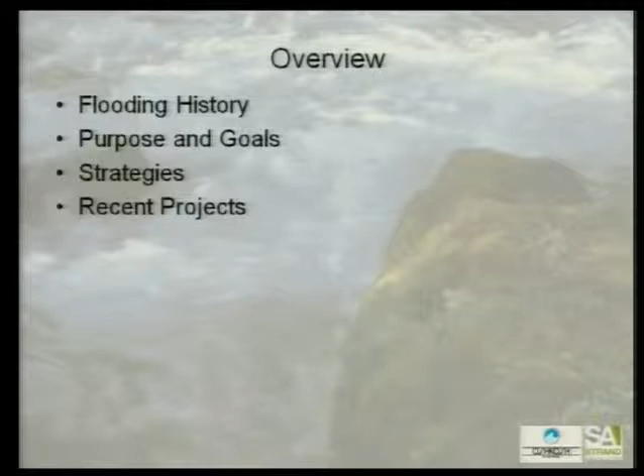All right, sounds good. Thank you very much, Emily. Some of the things we're going to be going over today, we're going to get into a little bit of the history of some of the flooding issues that we've had here in the City of Oshkosh. Talk a little bit about the purpose and goals of our stormwater management program. Get into some of the various strategies that we use for reducing the impacts of flooding and improving water quality, and then go over some recent projects over the past 5 years or so.

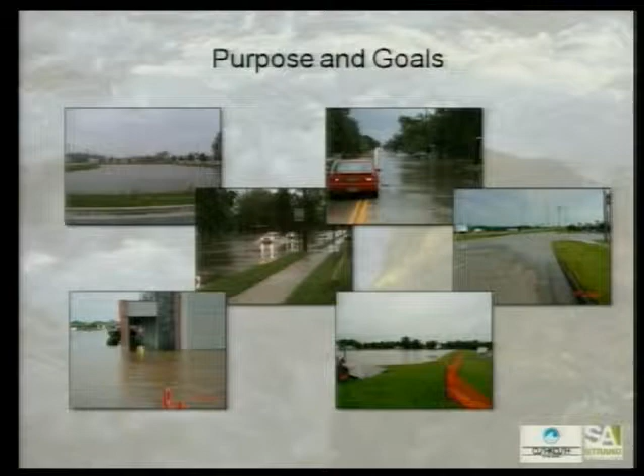Some of the purpose and goals of our stormwater program: we're always trying to reduce the health and safety impacts due to flooding, both in the street and on private property. Street flooding impacts the ability of our emergency services, police, fire, ambulance service. If the streets are flooded, they can't get to somebody who might be in dire need of emergency services. It also impacts healthcare facilities. We've got Mercy, Oakwood, Aurora, and numerous other facilities. Evergreen Manor is a senior assisted living facility over along Sawyer Creek. So there's a number of those type of facilities that have also suffered from flooding over the past several years, and then all the other impacts to residential properties and other businesses within the city.

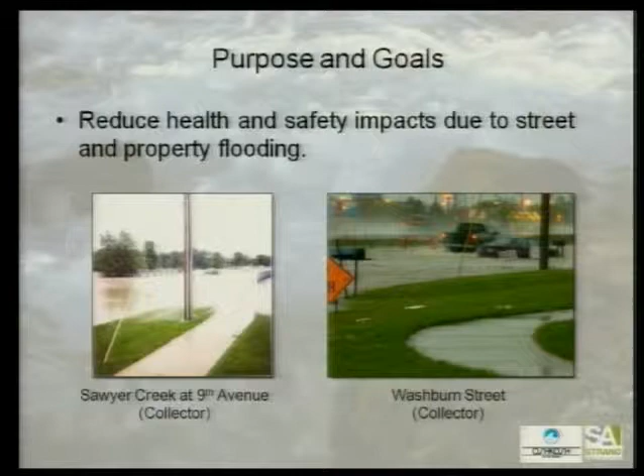Taking a look at some of the more severe areas, we've got 9th Avenue, which is classified as a collector street, not a local residential street - it sees a fair amount of traffic - and Washburn Street, just south of 9th Avenue. You can see in these images significant amounts of flooding, to the point where the streets really aren't passable. This Washburn Street location is maybe 1,000 feet from a fire station, so again fire department access is limited by these street flooding incidents.

They've had instances where they've had to deploy sandbags to try and stop the creek waters from entering their facility. Again, Westfield Street over by Evergreen Manor has had to spend a lot of time preparing for and responding to flooding during some of these major events.

It doesn't even look like a street there. No, it really doesn't. It's like a river.

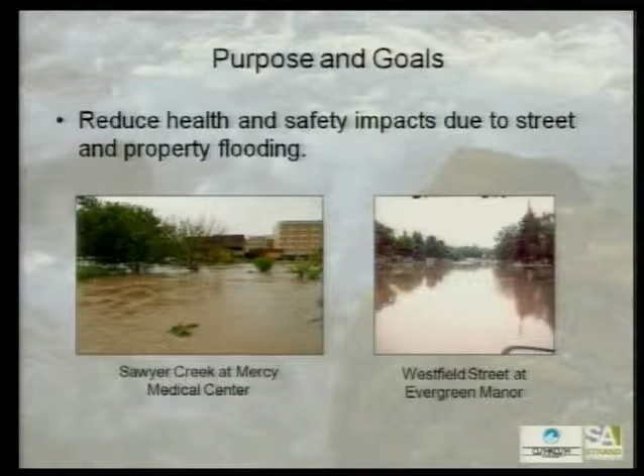During the 2008 storm event, while I was out reviewing some of our flow drainage ways around the city during and after the storm, we actually watched a couple of people park in the Mercy Oakwood parking lot, get their kayaks off the roof of their vehicle, and put in at Mercy Oakwood to kayak down Sawyer Creek. Oh my gosh. So yes, it's pretty significant.

And that volume of water is dangerous. You don't want people trying to do that because it is very dangerous. You don't want to depend on your kayak for your morning commute.

Now, you said that they have had to set up sandbags and everything to prevent the water from coming into their facilities. Have they ever had any kind of damage done?

I know Evergreen Manor has had a significant amount of flooding damage over the years. In my conversations with Ken Arneson from Evergreen Manor, they have had millions of dollars of damages over the past 15, 20 years due to flooding.

Mercy Oakwood, I believe, has had some damage as well. But like I said, they have sandbags, and they have at times requested assistance from the city crews to help them deal with some of the issues. But yes, to my knowledge, they have also had damage in their facility due to that flooding.

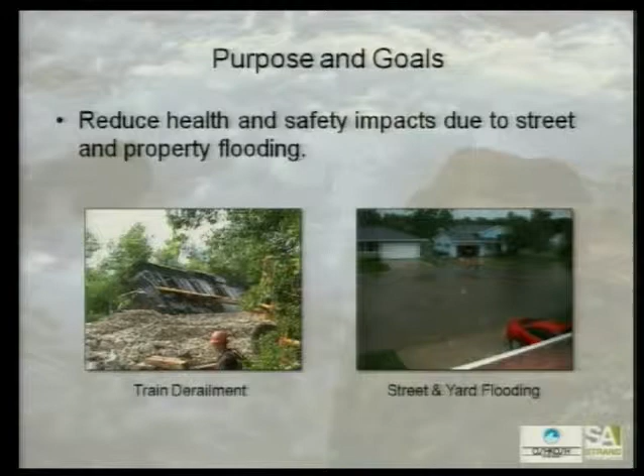Again, into some more of our purpose and goals: in addition to trying to reduce the amount of street flooding and property damage, we're also trying to reduce the amount of clear water that gets into our sanitary sewer system.

There's been a lot of talk about I&I, inflow and infiltration into the sanitary sewer system. That sanitary system is designed only to handle sanitary waste - flushing your toilet, taking a shower, running your washing machine. Those are not high flow generation activities, so that sanitary sewer is only sized to handle that flow.

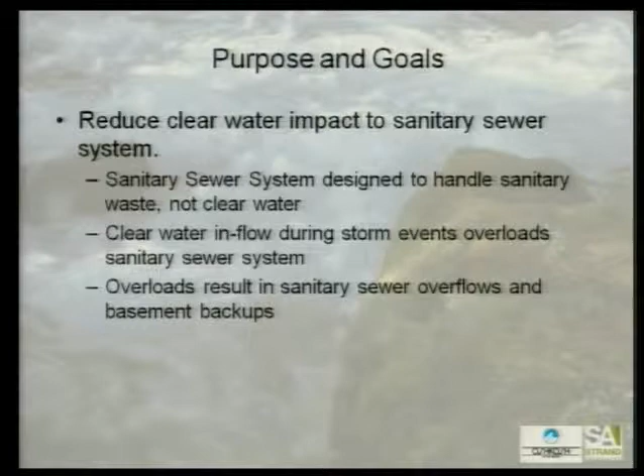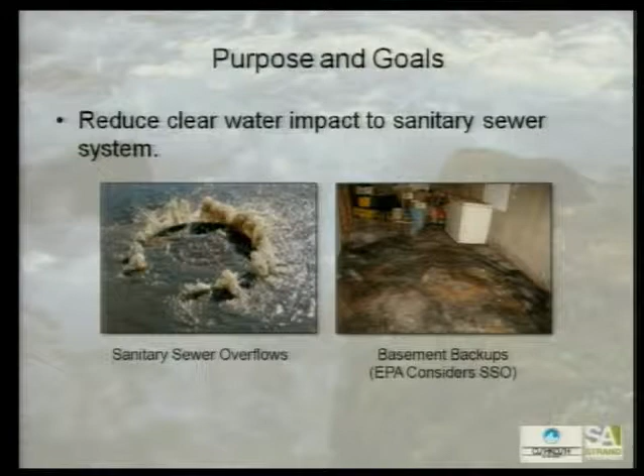And on the other side, you've got a basement backup where clear water overloaded the system, and clear water and sanitary waste all backed up into a basement and caused damage as well. So it's a different system, but in these heavy rain events there's such an ability for the two to interact that the stormwater system - we're really trying to do our best to get that water off the street to reduce the impacts on the sanitary system.

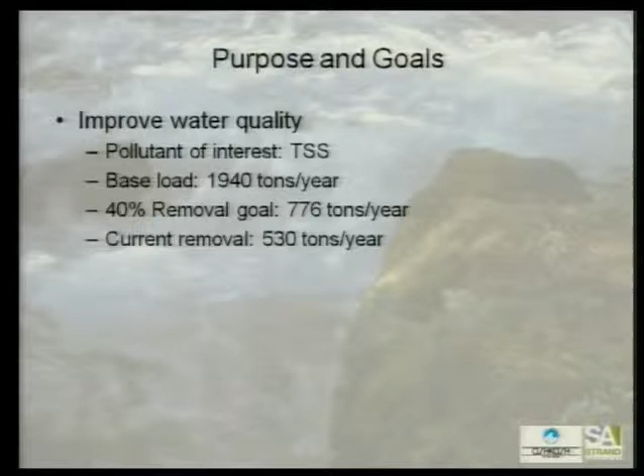Another one of our goals that we briefly talked about is improving water quality. The Department of Natural Resources looks at total suspended solids, or TSS, as the pollutant of interest. In general, all the other pollutants, the heavy metals, the phosphorus that runs off with your lawns, tends to cling to the sediment particles. So the suspended solids is the pollutant that the DNR has chosen to try to model.

As we continue on, there's regulations in place now for phosphorus as well. Looking at the base load from the city of Oshkosh, we generate just under 2,000 tons of sediment a year in our stormwater system. To meet our 40% removal goal, which was put in place by the state, there have been some changes, but that's still the goal we're looking at. We need to remove just under 800 tons per year.

Right now, with all the practices we've got in place, the detention basins we've built, the street sweeping, which picks up all that sediment off the gutter of the street, some of our streets that are still rural sections where there's a ditch, and practices like the biofilters we installed out here in the City Hall parking lot, those are all a number of practices that serve to remove those pollutants. So it's kind of a proactive thing—you're trying to get rid of the pollutants before they have a chance to get into the stormwater.

As soon as the stormwater hits the surface and starts to flow across it, it's picking them up. So street sweeping is a proactive approach, trying to get those pollutants off the surface before the water picks them up. Once it's in the stormwater, detention basins and biofilters are trying to filter those pollutants out of the runoff. Yes, got it.

Right now, our practices are removing about 530 tons per year. So we've still got about 120 tons in our planned projects, and about another 120 to go to meet our goal.

One thing to keep in mind, Lake Butte des Morts, the Fox River, and Lake Winnebago are considered impaired water bodies by the Environmental Protection Agency. As such, the EPA has mandated the DNR to do an analysis called a total maximum daily load. What that does is say this water body is capable of assimilating this amount of sediment without causing it to not meet its recreational purposes. So the Fox River, for example, is used for boating and fishing, so there's a certain amount of sediment the river can assimilate and still be clean enough for those recreational purposes.

So with the total maximum daily load, or TMDL as it's often referred to, it says this water body can only take this amount. Then the analysis says, just throwing a round number out, it can take 200 tons per year. But City of Oshkosh, you're putting in 2,000. Well, you've got to reduce that. So that's what that analysis does.

We know they've started the analysis on the Upper Fox. We expect early in 2015 we should be seeing some preliminary load allocations to tell us where we're going to be getting to. And by late 2015, early 2016, we'll be given a requirement that we have to start working towards.

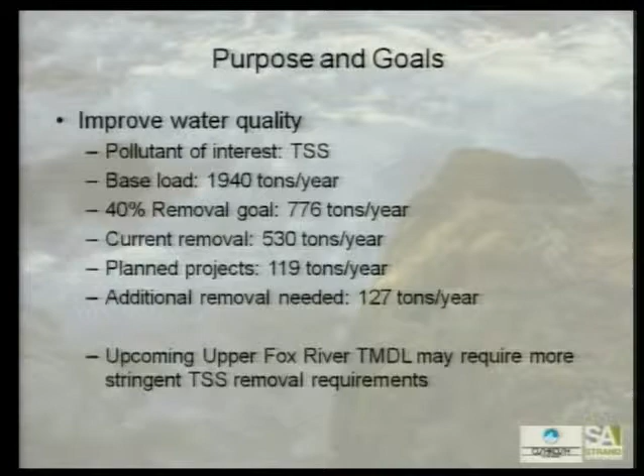So that 120 tons you see up there for planned projects, 50 of that is right in that Armory project. Excellent. So yeah, we're always looking for ways when we're doing a project to also improve water quality, because it's less expensive to do both at the same time than to do one and then come back and try to retrofit the other later. Definitely. Great.

A little bit more about our purpose and goals. You will hear us as design engineers refer to a 10-year design storm. Really, that is a storm that has a 10% chance of happening in any given year. You could roll the dice and get 5 ten-year storms in a row. So what we're trying to do is keep that runoff completely off the street and in the storm sewer system.

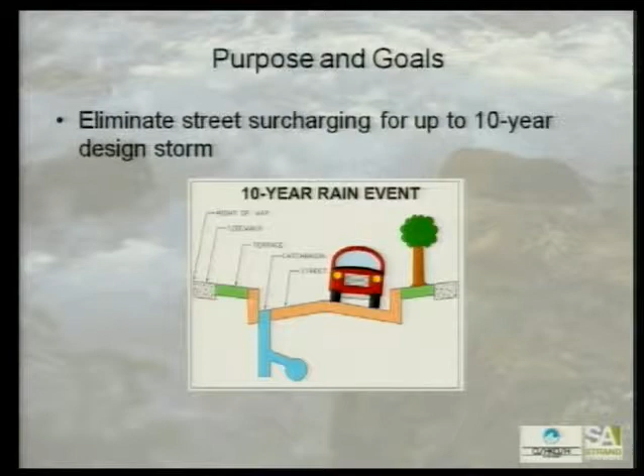Getting into what we refer to as a 25-year design storm, which has a 4% probability of happening in any given year, we're trying to keep the center of that road dry. So the gutter and parking lanes, there's going to be water standing there, but we're trying to keep that center clear so emergency vehicles can get in and out. So somebody gets off work and it's been raining all day, they can still get to their house, but there's going to be some water standing in the street—still drivable.

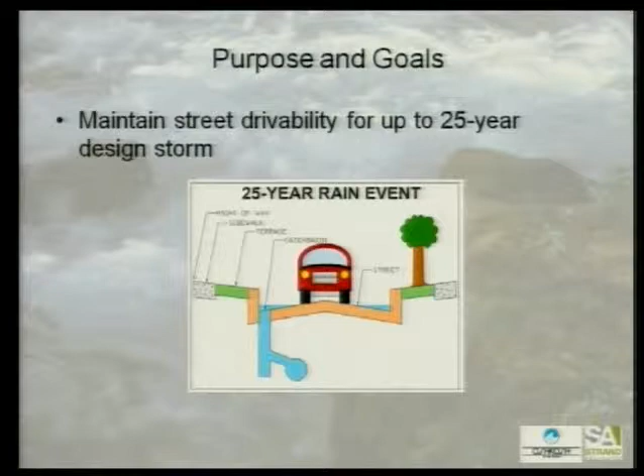And then that 100-year design storm, or that 1% chance, we're just trying to contain that in the right of way and keep it from getting out and impacting other properties.

One question I had when we were briefing was, what exactly do you consider the right of way—starting at the sidewalk, which end of the sidewalk, or at the terrace? Generally speaking, in the City of Oshkosh, the right of way is from the back of sidewalk, or your house side of the sidewalk, all the way to the back of sidewalk or the house side of the sidewalk on the other side of the street. So the sidewalk is completely contained within the street right of way, pretty much up until your property line.

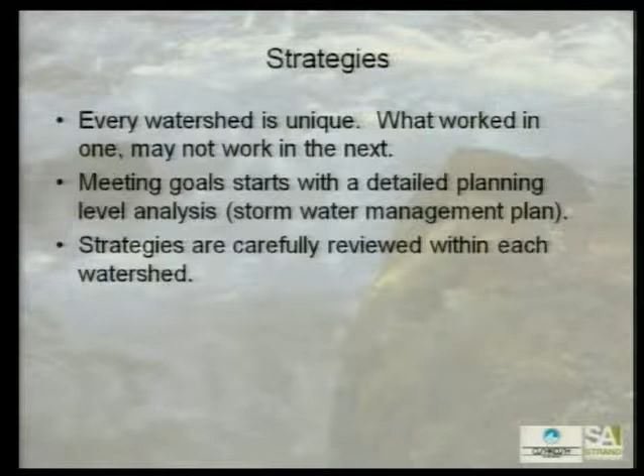Some of the various strategies we go through—every watershed is unique, and what works in one might not work in another. Really, meeting our goals starts with a detailed planning level analysis, or what we refer to as a stormwater management plan. Then as we're going through the plan preparation, the strategies are reviewed for each watershed as we're going.

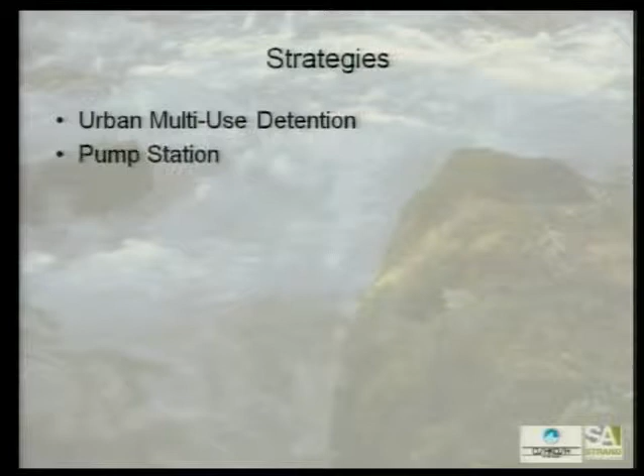We look at kind of an urban multi-use dry detention basin, which corresponds to the Tipler detention basin we're going to talk about. We've also got a large pump station.

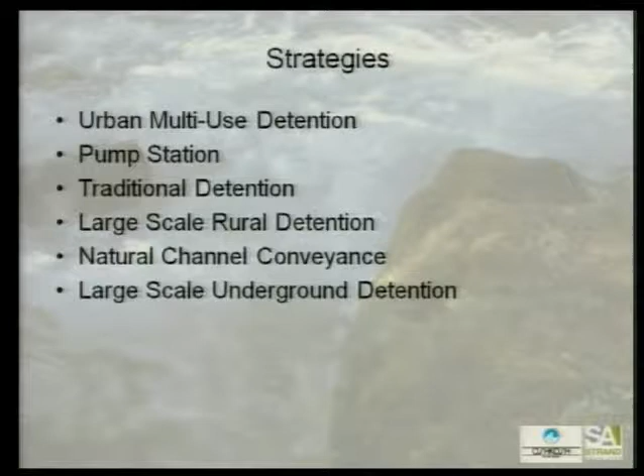Here in the City of Oshkosh, our strategy is really to avoid pump stations if at all possible, because when do you need the pump station to work? During a storm event. When is the most likely chance the power is going to go out and the pump station's not going to work? During a storm event. So one of our fundamental beliefs is gravity always works, so we try to convey the stormwater with gravity when at all possible. As an absolute last resort, we'll go to mechanical or pumping, because that's the time it's going to go out, and that's when we need it the most.

And the other options look a lot nicer than the pump station as well. Yeah, it's very expensive—that's the Melvin Avenue pump station. We'll talk about it a little more, but it was a very expensive project. It was the only option for that watershed though.

Traditional detention basins, something like the West Haven Clubhouse area basin—large scale projects like the James Road project, that site sits on 55 acres of land, a very large project. Some channel conveyance upgrades, the Sawyer Creek dredging project is a prime example of that. And the large-scale underground detention—anybody who came to City Hall in 2013 was well aware of what went on there. Anybody who visited our website too—I want to extend a thank you to you and your staff for all the time and effort that went into being able for us to live broadcast that project out on the internet. That was huge.

And then, storm sewer conveyance—anytime we're doing a project, we're trying to put in larger conveyance just to get that water off the street.

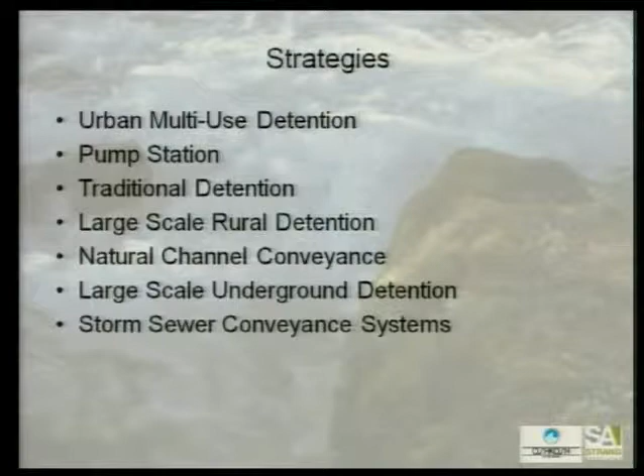Getting into some of our recent projects, I'll turn this first one over to Matthew, who was the design engineer for the Tipler Dry Detention Basin.

The Tipler Dry Detention Basin is literally right behind Tipler Middle School. In such a developed urban area, large open pieces of property are hard to come by. Schools are great places to look, but we don't want to take away their recreational fields, their soccer or athletic fields.

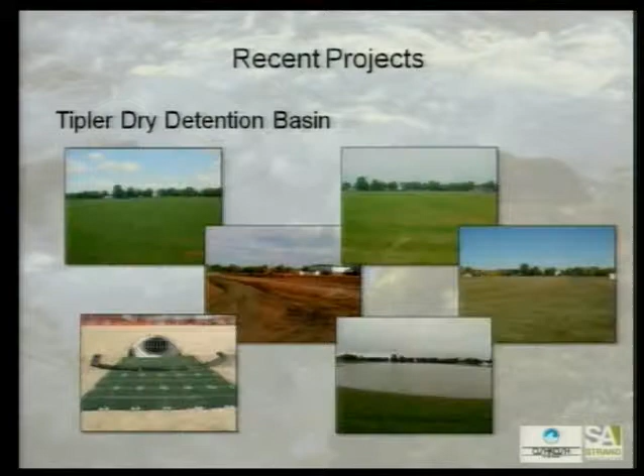Working through the school, this became our multi-use detention basin. We were able to depress the area behind the school to temporarily contain the stormwater, and we put in an underground drain tile system to get that athletic field back into use more quickly.

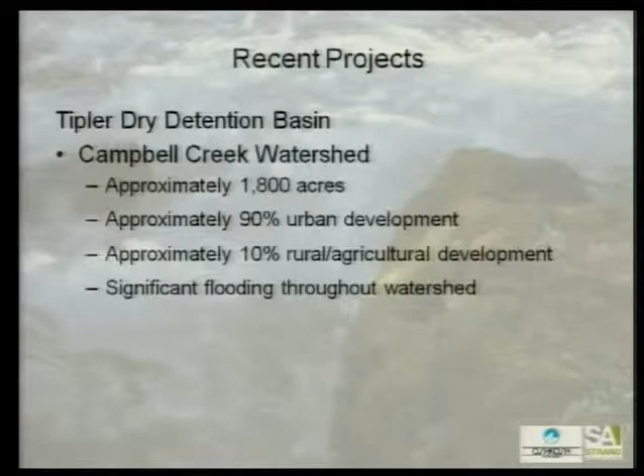It probably was wet for 48 hours, not usable for about a week. That's the difference between a traditional detention basin and a dry one: the dry basin is still level land, gets flooded for a couple days, but eventually dries right back out to a field.

When we're utilizing school property for such a thing, we really want it to get back to that school use as quickly as we can. This was an area experiencing significant flooding—the property had flooded before, not to the same extent, and it really helped a lot of people in that urbanized area.

That athletic field routinely flooded during major events. With this project it's usable in maybe a week, whereas it was a month in some prior events before they could get back out and use it.

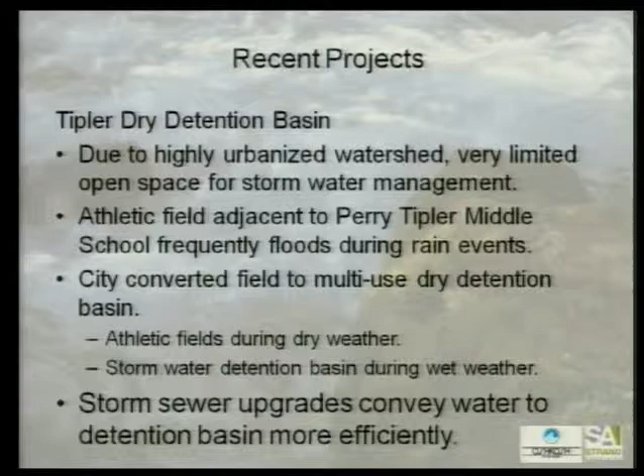We also had to do some conveyance upgrades—the storm sewer pipes upstream of the basin had to be improved so we could get the water there more quickly. Conveyance is simply where we pick up the stormwater in an inlet, it gets into the pipe, and then gets conveyed or redirected somewhere, in this case discharged into the detention basin. Those upstream conveyance systems were as important as our ability to detain the water in the basin.

The approximate construction cost was about $600,000. We benefited significantly from the Highway 41 work going on at the time. Typically the excavation would have been far more expensive, but that dirt was needed on the 41 project, so contractors were willing to come in and dig it out at a very reduced rate.

The DOT was paying contractors to find dirt, primarily for constructing the Butte des Morts Causeway—a lot of dirt went into that construction. So contractors were bidding our projects at a quarter of the excavation costs we'd normally see, because they were getting paid by the DOT on that side and by us as well. We saw significant cost savings on projects that took place at that time—everybody kind of wins.

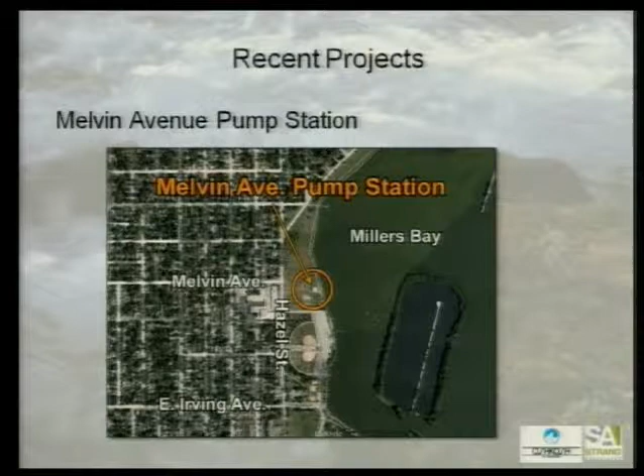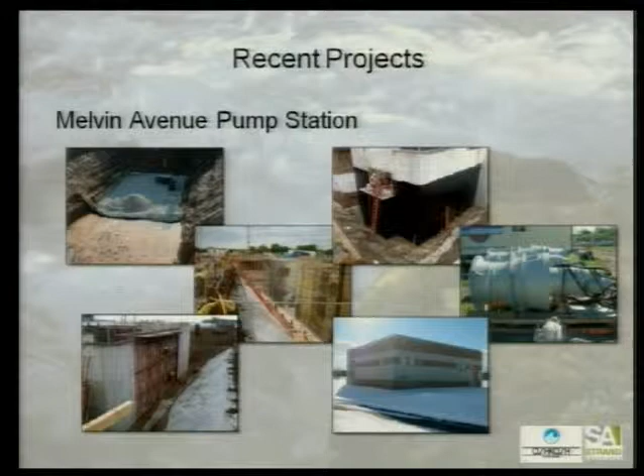Moving on to the Melvin Avenue Pump Station project. Here you can see the pump station is located just off the east end of Melvin Avenue in Menominee Park, for those that play softball, just north of the Reetz Diamonds. So it's a very visible location, but very important and functional. Some of the images here show during and after construction, giving you a scale of the work taking place.

The Melvin Avenue watershed itself is only about 105 acres, so not a very large watershed, but it is completely developed in urban development. There's no open space. So in order to do a traditional detention basin, which was one of the alternatives we analyzed, would have meant purchasing and demolishing several homes to construct the detention basin.

So in this case, we did look a lot harder at some of the other alternatives. There was significant flooding in the watershed, and the low point, right at the intersection of Melvin and Evans, the street elevation is only about 6 inches above the Army Corps regulation for the lake level for Winnebago for boating season. So any amount of water in that intersection would flood because it just couldn't get off the street, since it was impacted by the lake level so much.

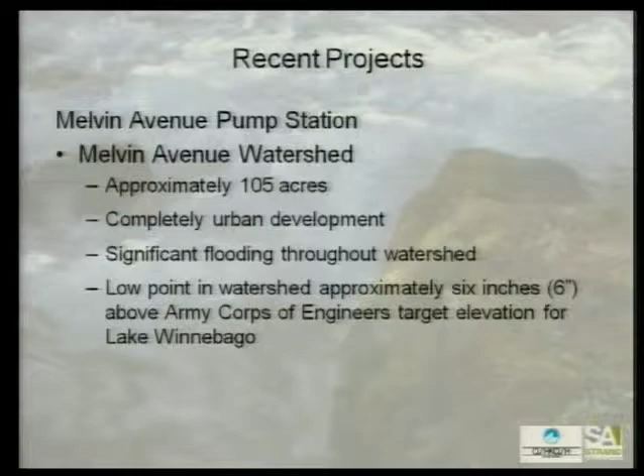Some of the people that had lived there for a long time, as we were meeting with them, would joke that the neighborhood kids go fish in the street inlet because there's fish in it, because there's that much water impacted from the lake. Or you see ducks swimming in the puddles.

As I mentioned, we did look at a lot of alternatives for this project: traditional detention basins, strictly doing storm sewer upgrades, or the pump station. Really the best alternative for us was that large pump station with some very significant storm sewer upgrades.

There is a 4-foot high by 8-foot wide box culvert storm sewer underneath Melvin Avenue that conveys the water to that pump station. That pump station has a design capacity of 180 cubic feet per second, approximately 81,000 gallons per minute. Another way to think about it is that design capacity is the same as the wastewater treatment plant's design capacity for the entire city of Oshkosh. So for only a 100-acre watershed, this is a very significant structure.

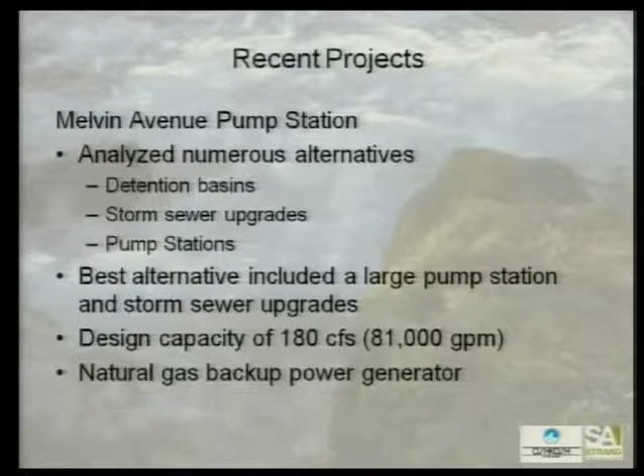As we talked about, gravity always works. We're trying to avoid this. The way we mitigate that potential is we have a natural gas backup power generator installed at that facility. Should the power go out, the backup generator will automatically kick in. The controls in the station sense when the power went out and will automatically fire that generator up so the station's immediately back online.

That does alleviate the worry that if the power would go out, which it often does during a large storm event, you wouldn't have to worry about that breaking down. How long has this pump station been in use for? The pump station was completed in the fall of 2010. So about 3.5 years now. And it's been working great since you've installed it?

Yeah, it really has. The staff at the wastewater treatment plant are also the staff that maintain all the sanitary pump stations, so they have working knowledge of this type of equipment, and they're the same staff that monitor this pump station at Melvin Avenue. The station also communicates via radio back to the wastewater treatment plant, which is manned 24/7, 365. If something happens at the pump station, the staff know about it immediately and can dispatch service staff to go analyze the problem and get the station back operational. So yes, it is always monitored in that regard.

Our staff also go out and run that generator once a month just to make sure it's going to work when we need it. Have you needed to use it yet? To my knowledge, we have not had an outage during a storm event that's impacted that station. But, like I said, you don't want to find out when the power goes out that your backup generator doesn't work.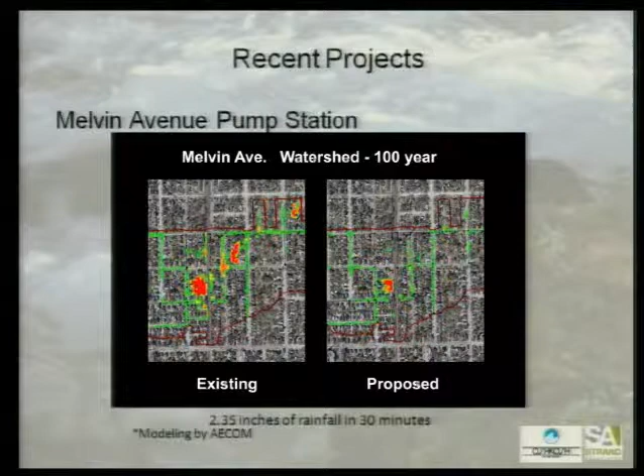These videos are generated from our modeling software. As we work through these analyses, we go back and look at an actual storm event, like the June 2008 storm, and run those existing conditions in the model, then check whether that reasonably reflects the amount of flooding we saw in this watershed. That's our quality control, our quality check on the model.

Sometimes it requires going back into the model to find things that needed to be set up a little differently. But generally we're seeing modeling results that very closely mimic those actual storm events. That's something we do with all of our analyses. It provides great confidence in the design or the solution.

When we go to the public with a solution that costs literally millions of dollars, and we can show them this is what it is without it, this is what it is with it, it is very powerful. Especially if after it's constructed and there is a storm event, they truly see those same results. It's almost prophetic, you see it, and when it happens, it's exactly as you said it would be.

Now, this pump station hasn't been around too long. Has there been a 10 or 25-year storm since we installed it? I would say the storm event from 2012, around May 10th, 11th, 12th, that was somewhere around a 25-year storm, a little bit more than that.

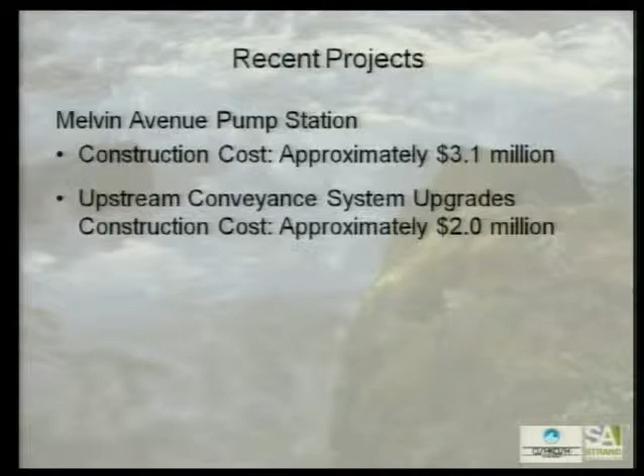So in this 100-acre watershed, we've put in excess of $5 million worth of construction projects to really deal with the challenges of this watershed. It's amazing the amount of progress that's been made. I've only been in Oshkosh for about a year now, and just hearing from the city manager and other city employees how bad it's been a decade ago, and the progress we've made, it's just amazing.

After all the construction, it's all worth it. But we've got a long ways to go, it's an ongoing effort. One analogy I use a lot is, it took us 150 to 200 years to get to the point where we were at. We're not going to fix that in 5, 10, or even 25 years. But as long as we continue to make significant steps forward each year, everybody's going to see the end results. Right now we're seeing specific areas really saying, wow, this has worked great for me. But then a guy 10 blocks over where we haven't done anything yet says, come on, I'm still underwater here, why is my basement flooded? Yeah, there's a lot of that yet. It's like I said, we can't fix it all in 5, 10, or even 20 years. It's going to take time.

Moving on, another project we've mentioned a little bit throughout the presentation is the Westhaven Clubhouse Area Detention Basin. This is located immediately south of the Westhaven Golf Course Clubhouse. You see Westhaven Circle just to the west of the project.

Throughout several storm events, leading all the way into the 2008 storm, there was significant flooding in this area. The residents inside Westhaven Circle had basements full of clear water. It wasn't a sanitary sewer backup. There was just that much water on the street and in their yards that it overtopped their basement windows and ran into their basements. So it's a lot of flooding.

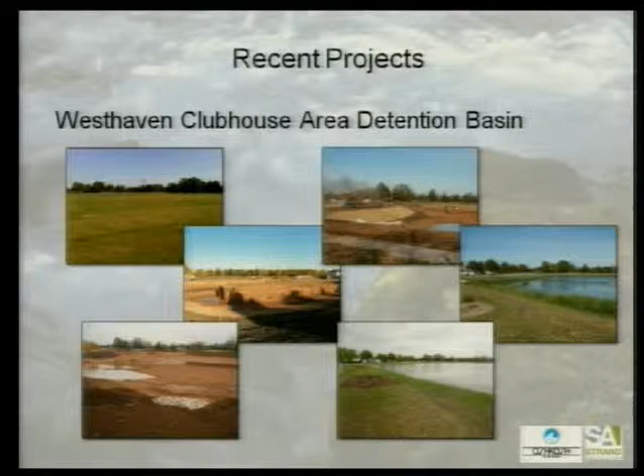Yes, very significant. And this is a traditional wet detention basin, if you will, so there's always a permanent pool of water. During small storm events, the ones that really pick up a lot of sediment off the street, by sitting in this permanent pool of water, it allows those sediments to settle out. Eventually we'll have to go in and dredge that, but it's removing those sediments and cleaning up the runoff, and then handling the larger volumes for the large storm events. So for a lot of people just driving past, they could think it's just a pond. Yeah, there's always water in it, yes.

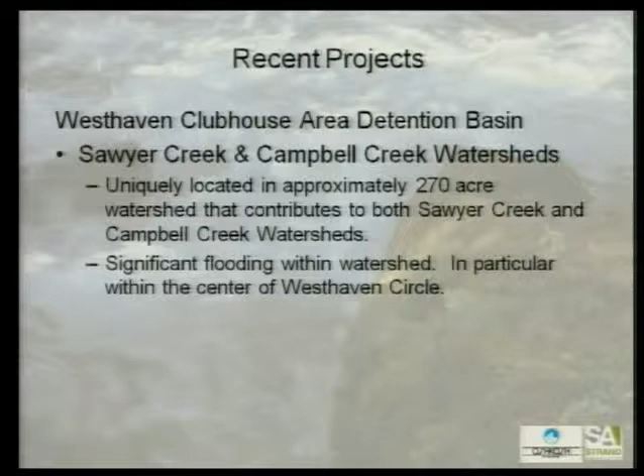The Westhaven Clubhouse area basin is uniquely located where Sawyer Creek and Campbell Creek overlap in their watersheds. It's about a 270-acre watershed that, depending on the storm sewer capacity along Highway 41, the runoff will either cross Highway 41 into Campbell Creek, or continue north into Sawyer Creek. So it can really go either way depending on which system has more capacity. And as we mentioned, there was a lot of flooding in this particular area.

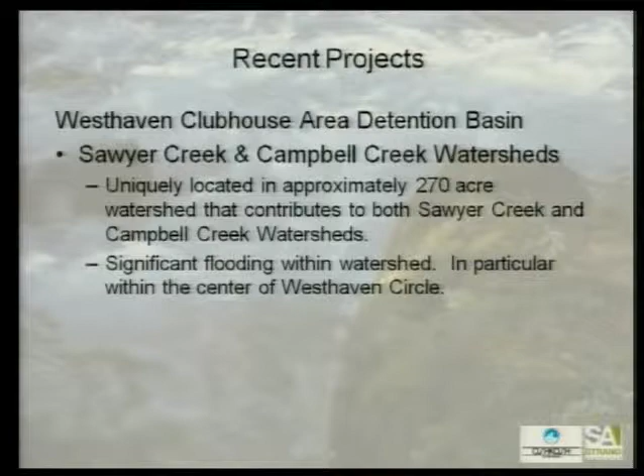So, we obtained the rainfall data from Wittman Regional Airport and entered the actual rainfall data into the computer model. This June 2008 storm was preceded, in the 4 or 5 days prior, by several inches of rain, so the ground was already saturated and couldn't absorb any more water. So everything ran off. The model calibration takes all of those things into account and visualizes it for you.

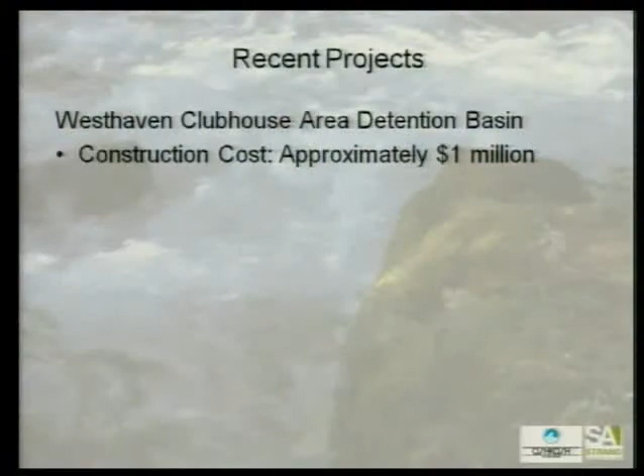With that, I'll turn it back over to Matt for the James Road project. Great, the James Road Detention Basin is the large-scale rural detention basin project.

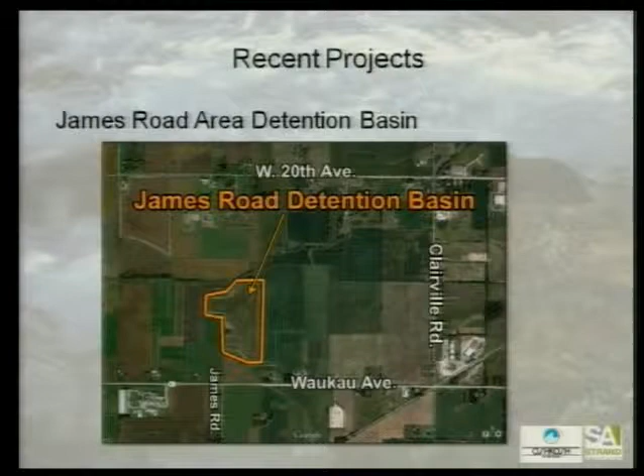It's difficult to grasp how big this detention basin is. James mentioned it's on a 55-acre site, and it's really at the doorstep of the city. I'd consider the city beginning at the intersection of Clairville and 20th, and we're just upstream of that in Sawyer Creek. So we're able to catch about 2,500 acres, not a 100-acre watershed like Melvin, but 2,500 acres of rural area into this basin, slowing down that storm surge before it gets into the city. That's the positive of having this wide open space to do that.

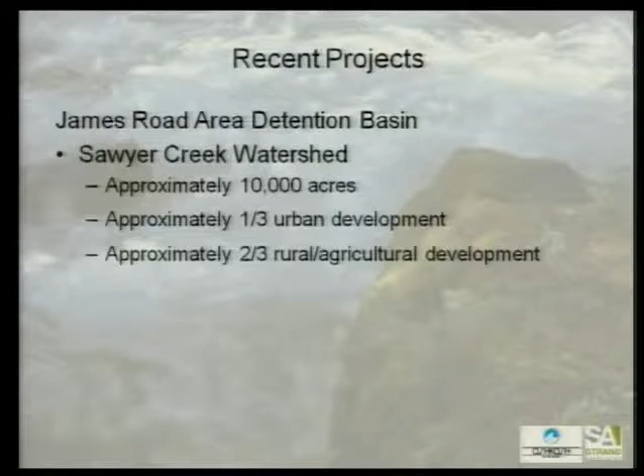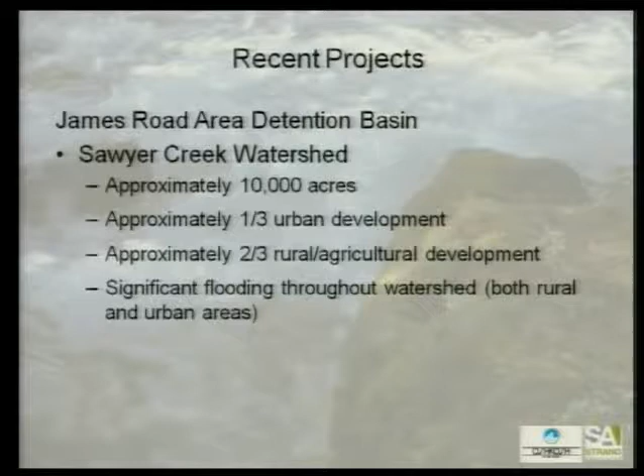The storage capacity is 250 acre feet, and an acre foot is literally that: 1 acre of land, 1 foot deep of water. An acre of land I usually equate to about a football field including the end zones. So it'd be 250 football fields, 1 foot deep of water. We did this all in about a 40-acre footprint of the basin, so the average depth of the water when it's full is about 6 feet.

The total construction cost was about $2.6 million. Including the land acquisition, it was 3.6. And we were fortunate to receive a community development block grant for this emergency action program of about $1 million, which offset our cost.

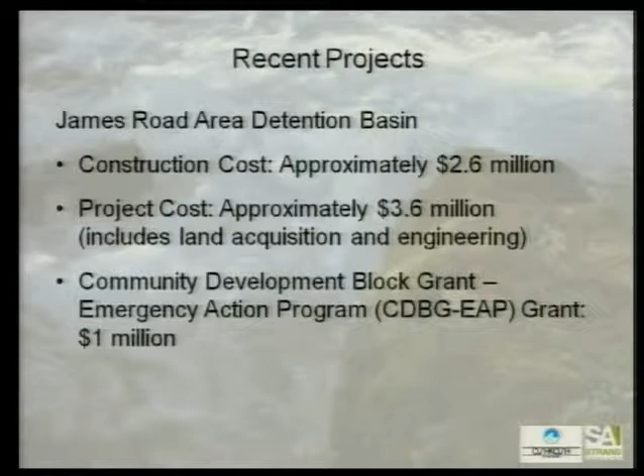We moved, in order to do this, 400,000 yards of dirt. This was really just a major earthwork project with a control structure to slowly release the water after we captured it. In this case, no, DOT wasn't available to take that dirt. We took it and moved it to another city-owned parcel for future industrial park expansion, for grading of that site, making it more developable or user-friendly to an industry that might want to come in and use it in the future.

So really it was not only filling the parcel but also leveling it. The existing land slopes were fairly steep, so if somebody was going to come in and try to develop it, it would be a challenge, and they would have to find a lot of material to do that. With this project, we were able to set up an off-road haul route.

So the contractor did not need to use licensed trucks. They could use off-road trucks, which haul a lot more material because they're not subject to the weight restrictions of our road system. They were able to move it about 1/2 to 3/4 of a mile off-road, then place it at this other location and compact it so we don't see a lot of settlement, and let Mother Nature finish the compaction for us over the next several years.

We were fortunate that the two sites were contiguous so they didn't have to go out on the road to get to the other one, and that was a tremendous cost savings. I'd say our dirt moving activity cost per yard went from $8 to $10 a yard down to $2 a yard. And when you're moving 400,000 yards, that adds up to a dramatic cost savings.

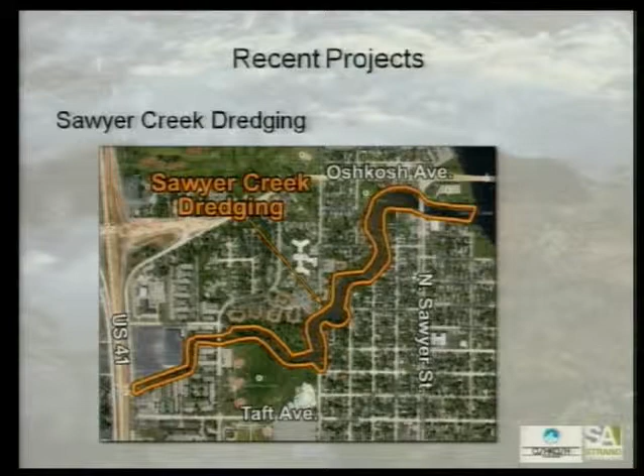The Sawyer Creek dredging project, or channel improvement project, extended from Keller Street, or Route 41, to the Fox River, about 7,000 feet, or just over a mile. Through numerous public involvement and informational meetings that the city had, there was an interest to see what effect dredging or improving some of the already natural conveyance systems might do to help relieve the flooding. Maybe you want to describe a little bit what exactly dredging is for someone.

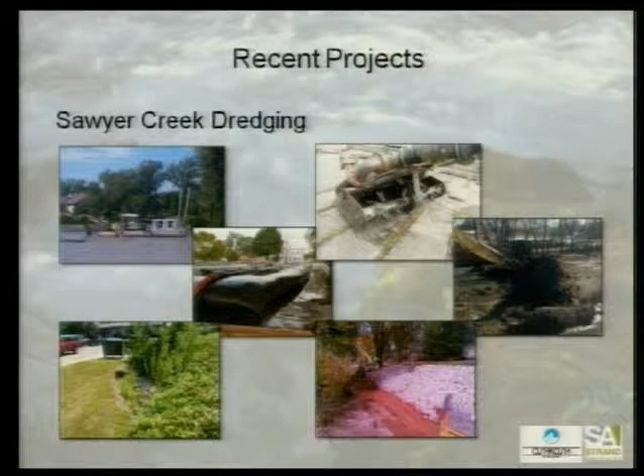I had no idea what dredging was when I first heard about it. Over time, sediment falls out of the water and accumulates on the bottom of the channel. It's the muck—when anybody steps into the lake or river and feels that squishy muck on their feet, that's what we dredged out. Once you get down deep enough onto the hard, natural bottom of the channel, that's no longer sediment.

So we didn't dredge much of that hard bottom, but really it was the soft sediment that we removed. And again, with this 10,000 acre watershed coming into Sawyer Creek, there's a lot of sediment. In fact, we removed about 40,000 cubic yards of sediment out of the channel.

That's amazing. It was actually roughly equal to the excavation for the West Haven area detention basin. When we constructed that basin, we removed about 40,000 yards of dirt. It's hard to visualize what 40,000 yards is, but for those people in and around the West Haven detention basin when it was being built, all the dirt we dug out of Sawyer Creek could have filled that hole back up.

Oh my gosh, and that was all sediment? All sediment. Yeah, and there were actually three very unique sections to the channel that you can see here.

The upper reach was very ditch-like—in fact it was a ditch. It was man-made, artificially dug years ago to realign the creek and allow development, the former Kmart site, or Sears for those who haven't been around the city too long.

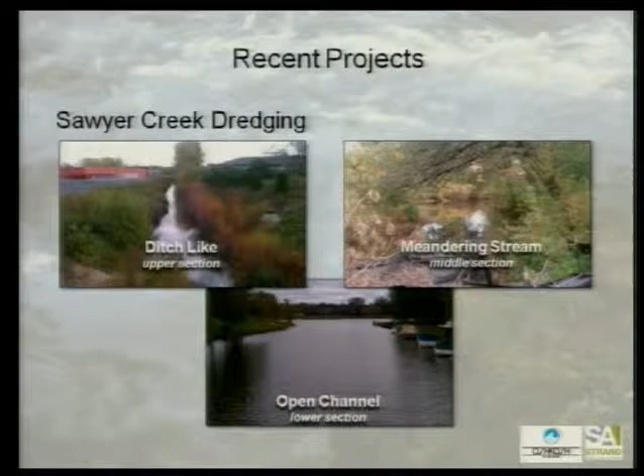Some of the dredging was done in the dry—we cofferdammed off and dewatered the channel, then took excavation equipment in and dug it out with traditional mechanical excavation, a backhoe and a dump truck. In areas where it was wet dredging, we used a hydraulic dredge, a unique, sophisticated piece of equipment.

That hydraulic dredge probably did the majority of the work, to tell you the truth—I'd say 25,000 yards were hydraulically dredged and 15,000 were mechanically dredged. You can't empty out the whole thing and do it dry. But in that upstream section where it was narrow, we were able to dam it off and get the water out much easier than in the lake-type section down below.

I think we've got some graphics coming up too, Emily, that will describe it a little bit better. There were a couple things we did to get our permit, and that was to mitigate the impacts to this natural resource.

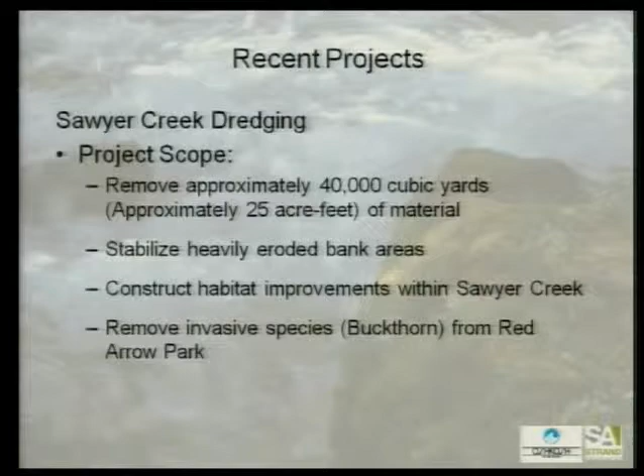Waters of the state, they're for everyone. When we came in to dredge, the DNR looked at that as an impact to the natural resource, so they wanted us to mitigate that—what could we give back for being able to go in?

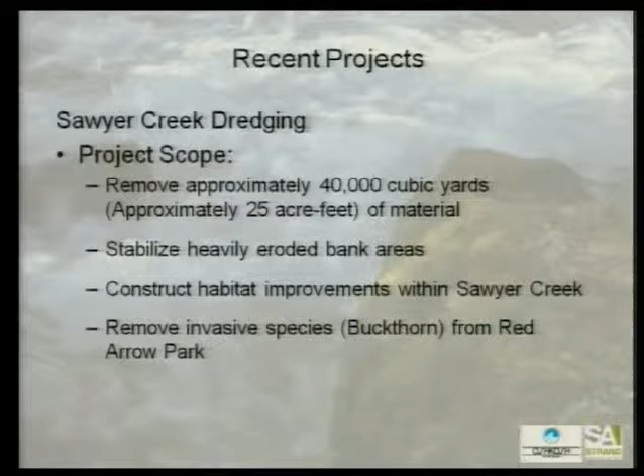So we stabilized some heavily eroded banks, constructed fish habitat in two separate locations along the creek, and removed an amazing amount of invasive species, or buckthorn, within Red Arrow Park. That dramatically changed that park—anybody out there will know what we're referring to when you see it.

I think we also have some more pictures coming up a little later to show a before and after of that. We got a lot of comments from people about the dramatic change they saw immediately with the park.

It's so interesting because it's not only a stormwater project at that point, it's so much more than that with all those extra benefits. Yeah, there are some ancillary benefits to it for sure. So this is our proposed channel section.

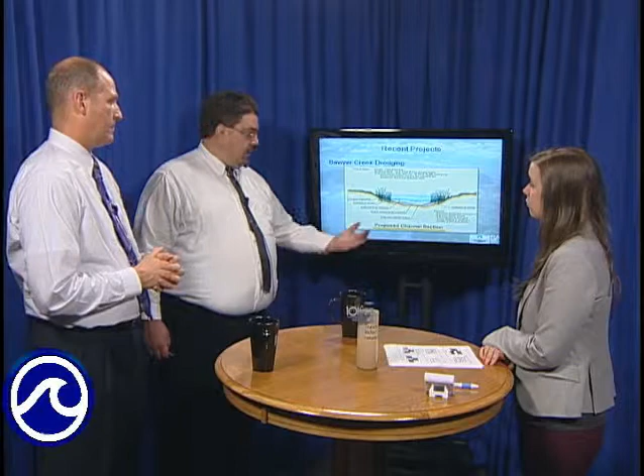One important thing to point out while looking at this image, near the banks our dredging area stops short of the bank. You can see that the area right near the banks, we did not remove the sediment from. That was one of the negotiated items with the Department of Natural Resources, because by leaving this sediment in the very near bank area, you're able to promote aquatic vegetation and provide habitat for fish and amphibians in that very near shore area. So some people might say, why don't you just go right from bank to bank? Well, that was one of the negotiated items we had with the DNR in order to get the permit to do the project.

Right, and that sediment is a natural part of a channel. It is. It also provides erosion protection. If we were to dredge right tight to the bank, the velocities in the channel would have been greater. The water has to slow down if there's that emergent vegetation. So it does provide some erosion protection, and leaving that soft sediment allows all the turtles to basically burrow in and hibernate in that soft sediment in the winter.

Great, so something you don't really think about when you're thinking of a project like this. Correct, DNR is always there to remind you of the environmental end of it, which was interesting. Yeah, and I think one of the things too, when we first reached out to the Department of Natural Resources to talk about this project, we first said, hey, we're looking at this, we want to come in and meet with you and kind of lay it out.

I think they were at first very, I don't necessarily want to say adversarial, but very close, because they thought at the time that we were ready to start work, I think. We sat down in that first meeting with the DNR, and I think they had about a dozen of their staff at this initial meeting. We sat down and started laying out our back-of-the-napkin almost sketches of what we were looking at. That first meeting was probably 2.5 to 3 hours.

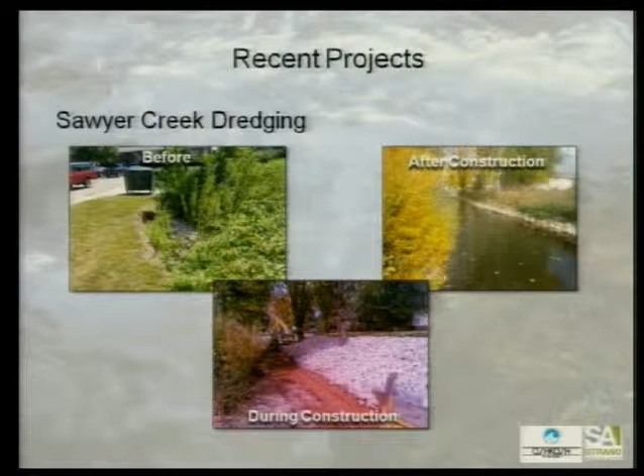That's really nice. But when we were done, it was again a very dramatic improvement. It took something that nobody wanted to see, it was ugly, kind of dangerous too. Ugly, dangerous for sure. And I don't know that it's an amenity, but it actually is, it's quite nice. The adjoining property owners were very complimentary of what was done.

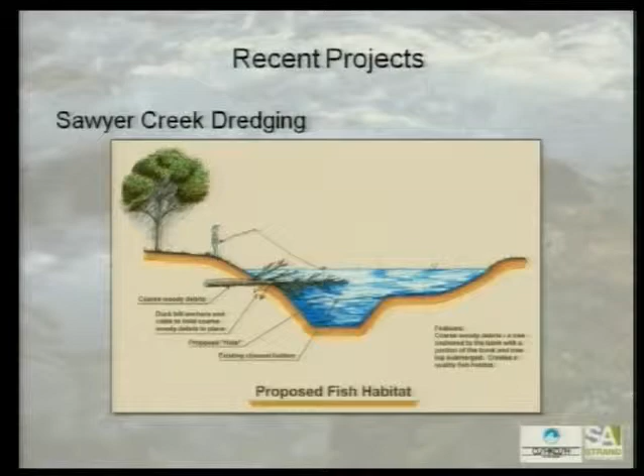Kendall Kamke, who was our DNR fisheries biologist, really helped us put this together, and it turned out so well. I can't wait to see kids that can come into the park and fish from the bank right there.

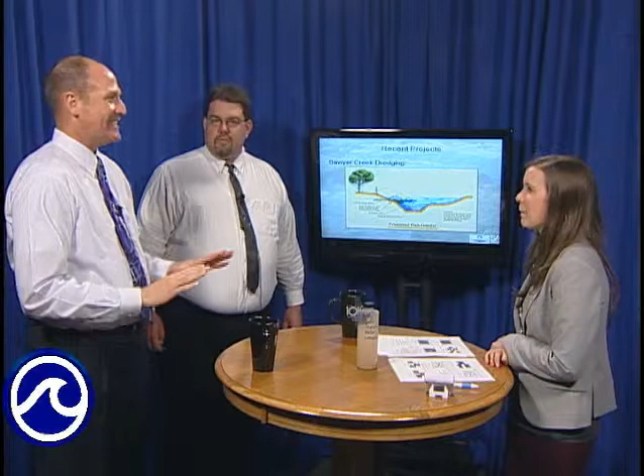And if you know the before condition, it was just an algae soup hole, swampy, only about a foot and a half of water there, and a lot of soft sediment. In that particular location there was several feet of soft sediment that were removed before we even got down to the parent material, which is what we dug that fishing hole down into. There were several feet of soft sediment in that location.

Now you have some happy fish with some happy little homes. Correct. It's very cool.

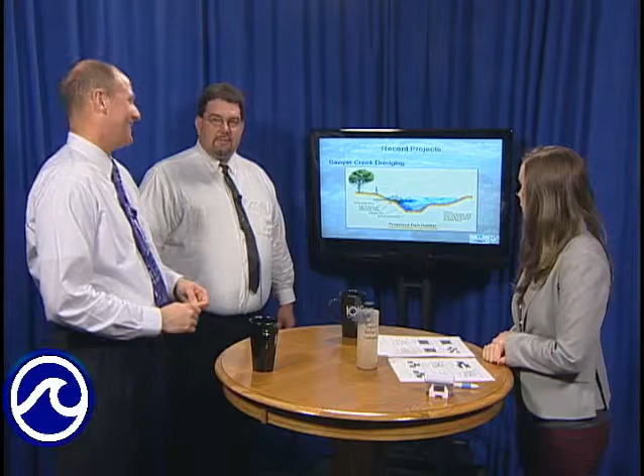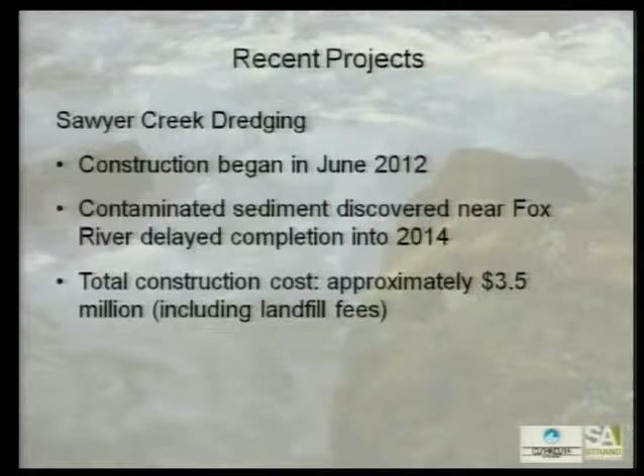Yeah, one of the things I'm not sure we mentioned was that all of this sediment was very rich, nutrient-rich, good stuff. It was taken out to a former fill site and was kind of used to reestablish a farm field. Other than the contaminated stuff, yes, correct, the non-contaminated stuff. So the majority of our 40,000 yards were able to go and be utilized again in a good way. It wasn't just fill somewhere.

Another interesting thing I've learned is there's all kinds of good soil, bad soil, different kinds of dirt, so that's kind of interesting. And one way to think about this too, that sediment that we're removing, like Matt said, it's very rich in nutrients. A lot of that stuff ran off of farm fields over the last 50 years, so it's got a lot of phosphorus, a lot of nitrates.

I think the first year they planted it, within a week the crops were already almost knee high. It just grew tremendously. It was very green.

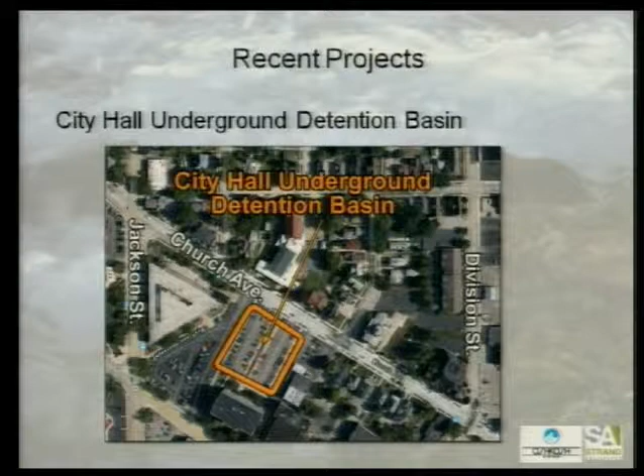Moving into the City Hall Underground Detention Basin project, right out here in front of City Hall. Anybody who came to City Hall in 2013 is pretty well aware of what we had going on.

The analysis for this watershed, the Division Street watershed, really began back in 2009. We had some street reconstruction projects on the north end - Prospect Central, Saratoga, Merrill, just south of Merrill Middle School. We did a lot of work in that area, and that's what started the analysis off.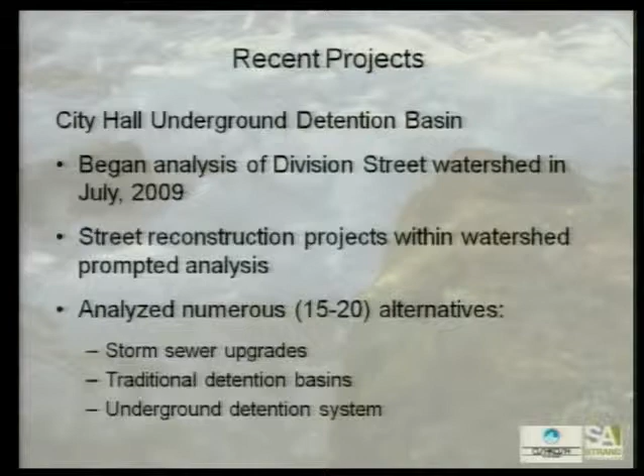We looked at 15 to 20 different alternatives - traditional detention basins, just doing storm sewer work - and ended up being able to take advantage of this large site that the city had here with City Hall and Safety Building, having a significant need for a parking lot and being able to use the area underneath the parking lot as stormwater detention.

Going to that 100-year, 1% probability storm, here we're looking at 2.35 inches of rain again in that 30 minutes. Very significant, and there are some very significant improvements in that Jackson Street area down by the Chamber of Commerce.

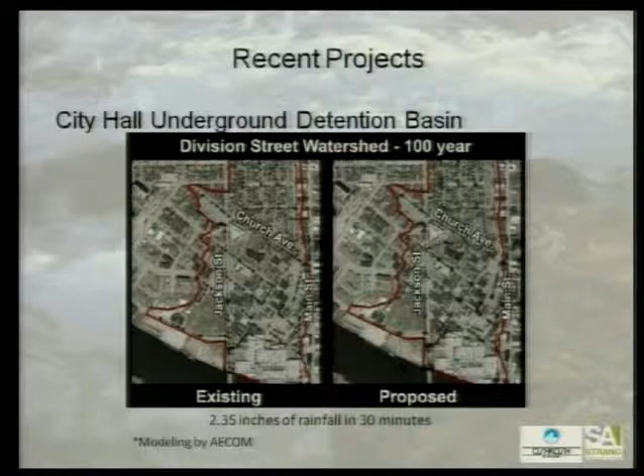Jackson Street is a major arterial street through the city of Oshkosh. It's one of only 5 bridges that cross the river, so if you're trying to get from the south side to the north side, there's only so many ways to get there. It was very important to try and keep that street much more passable, and you can see the results are very significant here.

Of all the alternatives we looked at, the one we really ended up going with has a lot of storm sewer work taking place in this watershed.

Before the construction in front of City Hall started - I don't know if you remember or were here at the time - we had a project coming up Jackson Street from down by the Pearl Avenue area, coming all the way up Jackson Street in front of the church and in front of Hardee's and into City Hall. That's really the outlet storm sewer - as the water leaves the underground system, that's where it's going.

Coming up in 2014, we've got some significant storm sewer work taking place on Central Street, starting just north of City Hall and going all the way up to Irving, then over to Division. So there's going to be a lot of large storm sewer going in to really put all the water into this underground system. That's kind of the next phase.

You've got the end point of all the water, and this is kind of creating the ways that the water is going to get there. Yep, that's a good way to put it. We've got the storage place in place, and we've got the outlet for it. Now we've got to get the water into it.

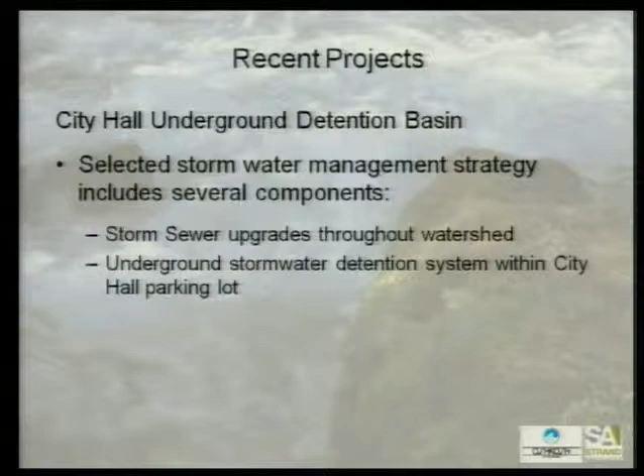It's too much work to try and do in any one year, so we had to split it up into multiple years. It made the most sense to be able to build the structure and the outlet first, and then build the system to get the water to it. I think another thing is you really don't want to do it the other way around.

You don't want to get the water there quickly and then not have a place to store it or a place to discharge it. So there is an order. People's basements will be where it'll end up.

Exactly. And it did help too, you know, 2013 being an odd year, there were no major elections. A lot of the other functions that really needed to be at City Hall weren't there. A lot of the meetings and things other than Plan Commission and Common Council remained at the building.

All the other meetings that take place here in City Hall were relocated to other facilities. For example, special events moved to the fire station. Stormwater Utility Committee moved over to one of the university buildings. We really spread out throughout the city to try and utilize other structures to take some loading off the parking lot, because we were basically taking half the parking lot out of service at any one time.

And half of what was left was needed for parking the official police vehicles. So city employees got a little extra exercise parking a couple blocks away. Perfect time during the summer, good weather, unless it was raining. But we had a snowstorm right early in the project that we had to walk through. Other than that, it was pretty good - an easy kind of transition, you could say. So that's really what we're doing.

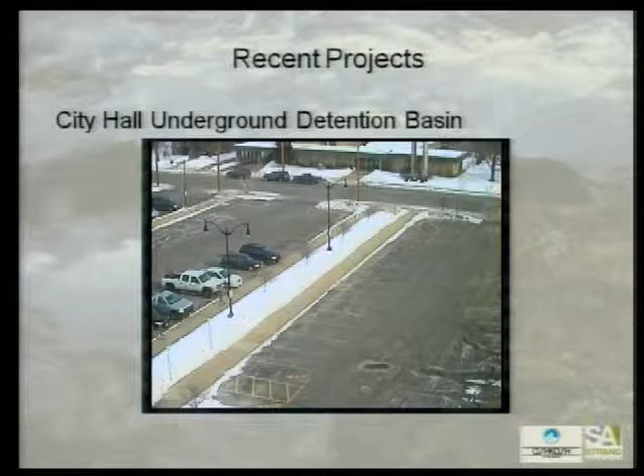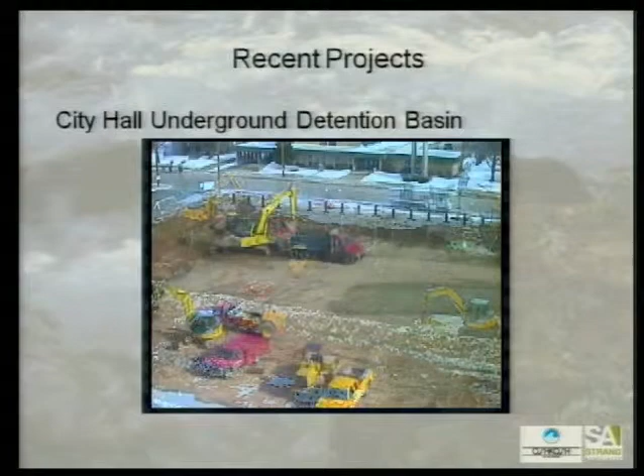The project started on March 4th of 2013. We had some good weather to start. A couple weeks into the construction, we did get a snowstorm, and that does show up on the video. This video was just taken with little snippets from the rooftop camera that Media Services was gracious enough to relocate and use to look over the project to help us out.

I know it was the Media Services staff that kind of grabbed these little snippets of video and stitched this together to give us an overall time-lapse look at the project. This website had a live broadcast feed all the time, so residents could jump on anytime and look at what was going on with the project.

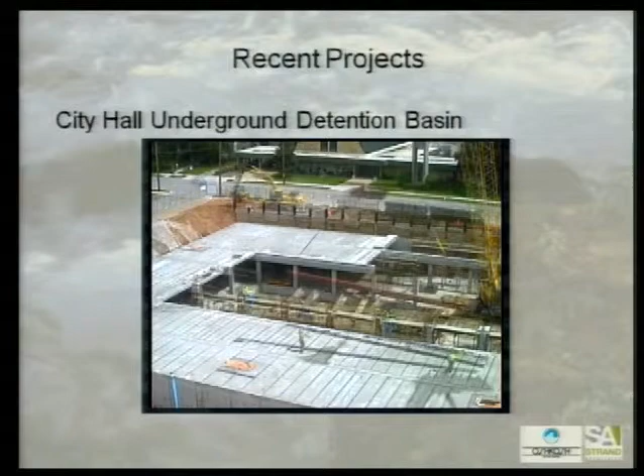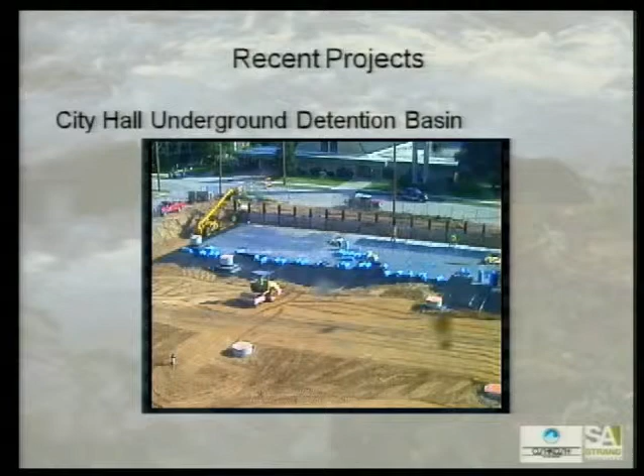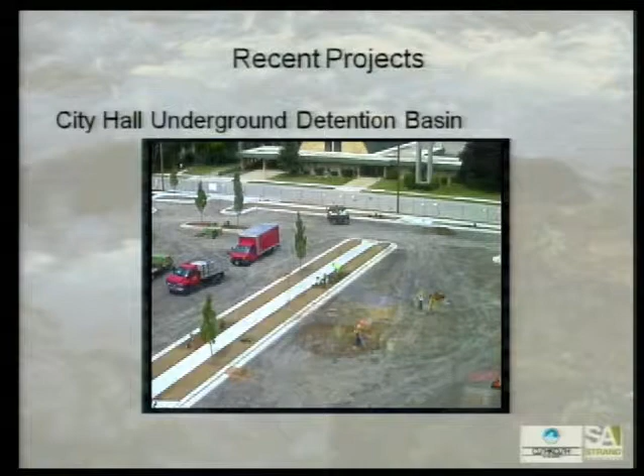It's interesting to see how deep the hole actually is when you can see all the vehicles and people walking around in it. From an aerial view, it's kind of hard to decipher exactly how deep it is, but you see them, and even in the video, it's deceiving. From the engineering offices on the 3rd floor, you'd look down and think, oh, that doesn't look so bad. But when I'd go down into the project to see how the contractor is doing, standing in the bottom of that hole 25 feet below ground looking up, you're like, wow, it's deeper than it looked from up above. So it's a very good look, but it's still deceiving until you really get down in there.

And you never have to worry about it collapsing on us or anything like that when we're parking our cars on the parking lot. No, it's very structurally sound. The complete design was structurally reviewed for being able to park a semi and vehicles and everything on it. So it's a solid structure.

And now you kind of wouldn't even know what was there if you weren't around. With a winter like we had, 2013 to 2014 being very cold, the telltale signs were there. If you walk around the parking lot, you see about 30-inch diameter grates in the parking lot. Those are nothing more than air ventilation to let air out of that underground system during a major event, because you've got a 5-foot high by 8-foot wide box culvert coming into the system and a 24-inch pipe going out. So if that box culvert's flowing full, as soon as the outlet storm sewer is submerged, there's nowhere for all the rest of that air to go.

So we thought about it, and we're like, well, how are we going to get this out and not cause the system to kind of airlock or freeze up? So that's what we did - we ended up putting in 7 large openings to vent that air during a big storm event.

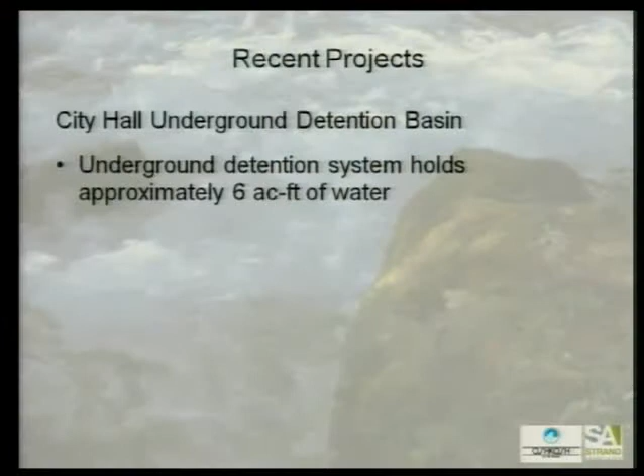The underground system itself holds about 6 acre feet. So again, using Matt's analogy from earlier, think of a football field about 6 feet deep of water—that's about how much water this system holds. The system itself is about 12 feet in height, so you can imagine it's about half a football field in area.

The total project cost was about $4.3 million. Of that, about $3.2 million was stormwater utility fund. Just under $1 million was general fund, for parking lot improvements not associated with the actual construction of the underground system. We also had a DNR grant for $150,000 on that project.

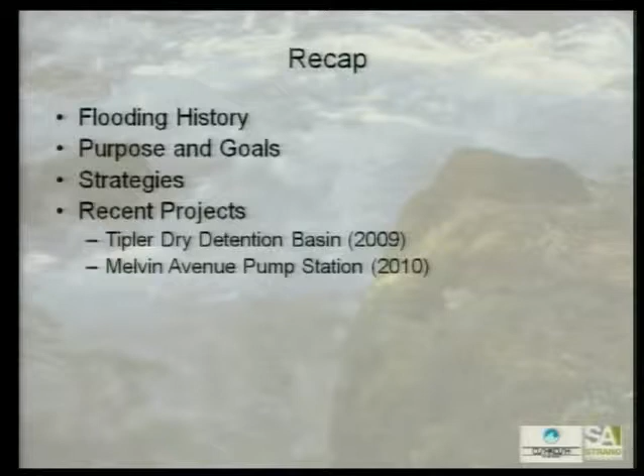So a little bit of a recap: we talked about the flooding history here in the city of Oshkosh, spent a fair amount of time on our purposes, goals, strategies, and then went over a lot of our recent projects, looking back over the last 5 years at some significant ones—the Tipler Dry Basin, the Melvin Avenue Pump Station, the traditional wet detention basin out by Westhaven, the large James Road area project, and the dredging project along Sawyer Creek with some significant improvements.

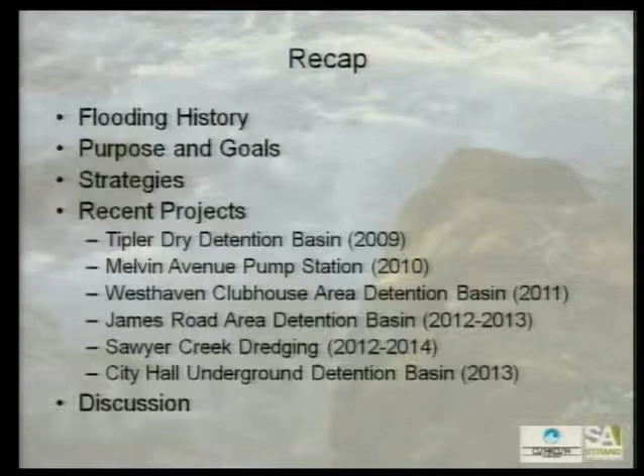And the underground detention system. Could you maybe talk about some of the future projects—what do we have planned for the next few years here? Sure. Right now, actually, the Armory, the National Guard Armory Area Detention Basin project kicked off about a week or two ago. Unfortunately, Mother Nature has not been very cooperative with us, and we've been getting a lot of rain, but that's really the big project for this year, getting that project going.

That's about an 18-acre site. It'll be a fairly traditional wet detention basin, with an open ditch section of Campbell Creek immediately adjacent to it. So it's a fairly good-sized project. We're going to see some very significant reductions in flooding in that area north of the Armory up to 9th Avenue and getting closer to Witzel Avenue.

So this works in conjunction with the Tipler project. They're both in the same watershed, on different branches of the creek that come together by Lourdes. So we've got two very significant projects working on reducing that flooding we see a lot in the Witzel Avenue area. Residents in that watershed will begin to see even more results since the Tipler one.

Other projects: we've got the 9th and Washburn area project coming up in 2015. Looking out a few more years, we've got another project on the north side, between Jackson Street and Main Street, in the Libby Avenue area. I think we're looking at about 2016 for getting that project under construction. So we've got some very significant projects planned out here for the next few years, and like you said, it really is a continuous project.